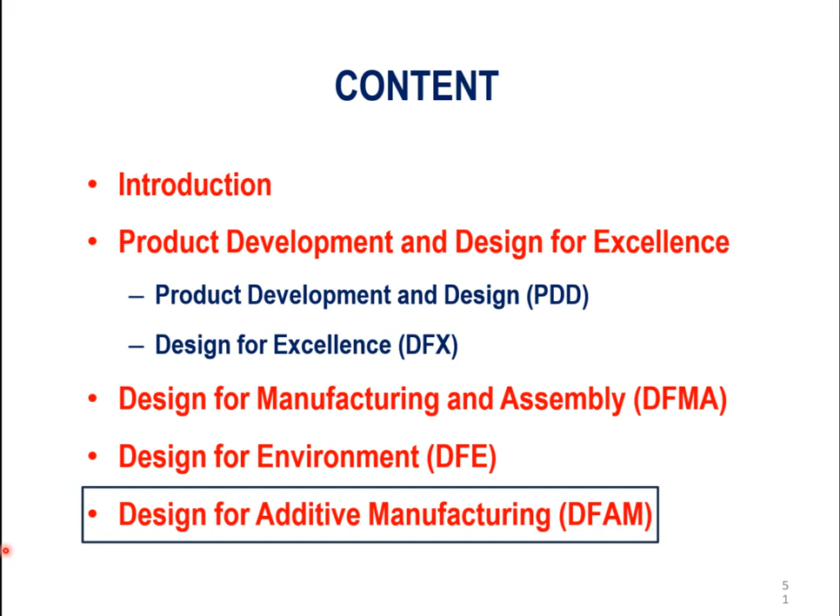Okay, so our fifth and last part of week six lecture is going to be about design for additive manufacturing. So design for additive manufacturing, or DFAM, is design for manufacturability using additive manufacturing or 3D printing technologies.

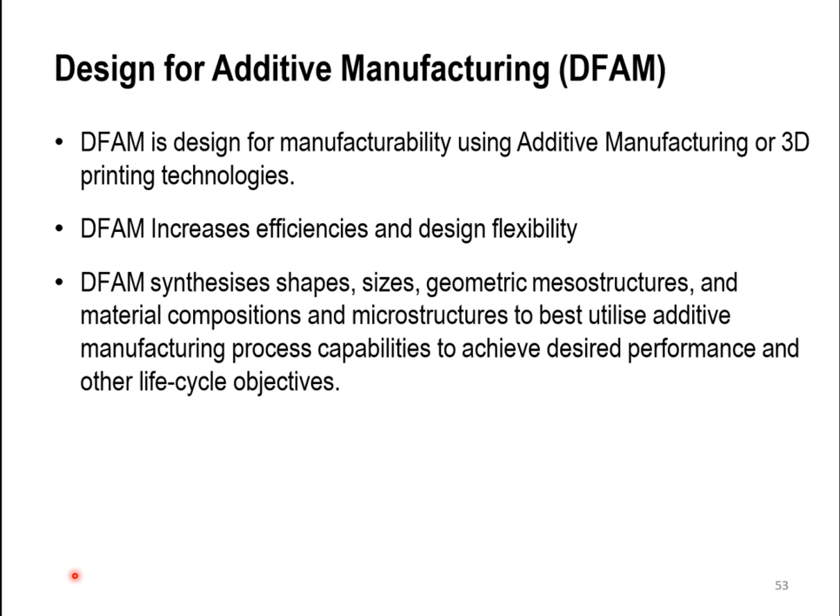DFAM is going to increase efficiencies and design flexibility, and synthesizes the shapes, sizes, geometric mesostructures, material compositions, and microstructures to best utilize the additive manufacturing process capabilities to achieve the desired performance and other life cycle objectives.

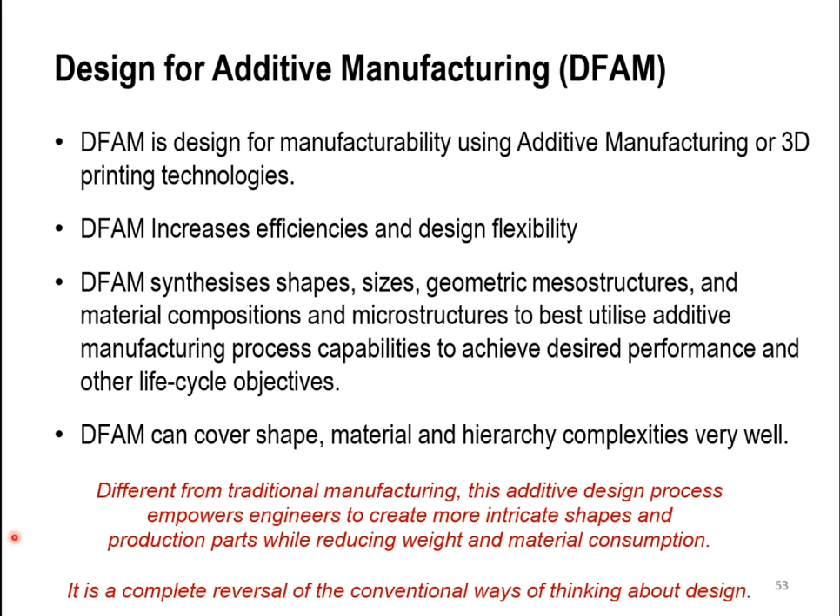So DFAM can cover the shape, materials, and hierarchy complexities very well, so it's quite different from traditional manufacturing. This additive design process empowers engineers to create more intricate shapes and production parts while reducing weight and material consumption. So it's a complete reversal of the conventional ways of thinking about design.

For example, DFAM is a collection of rules and best practices that designers and engineers must follow to achieve a high level of success in 3D printed part designs.

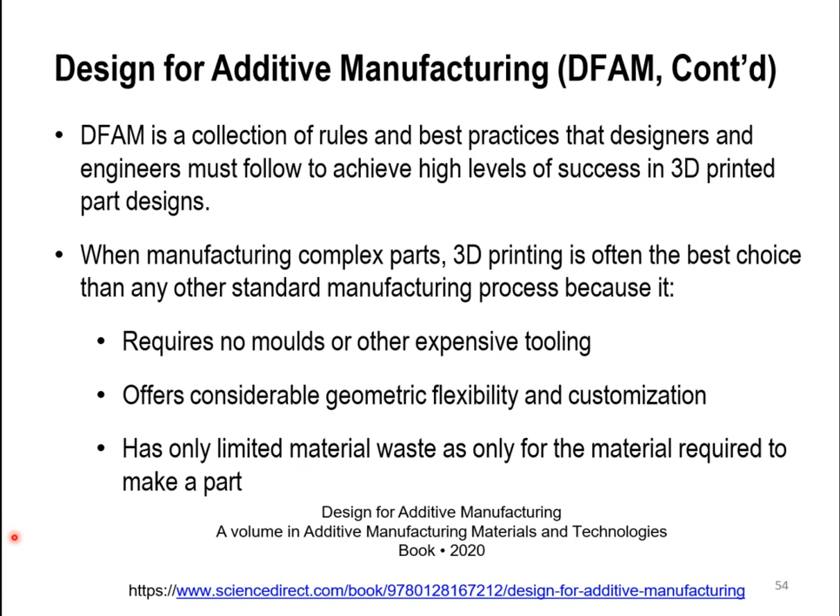When manufacturing complex parts, 3D printing is often the best choice over any other standard manufacturing process, because first, it requires no molds or other expensive tooling. Also, it offers considerable geometric flexibility and customization, and has only limited material waste, as only the material required is used to make the part.

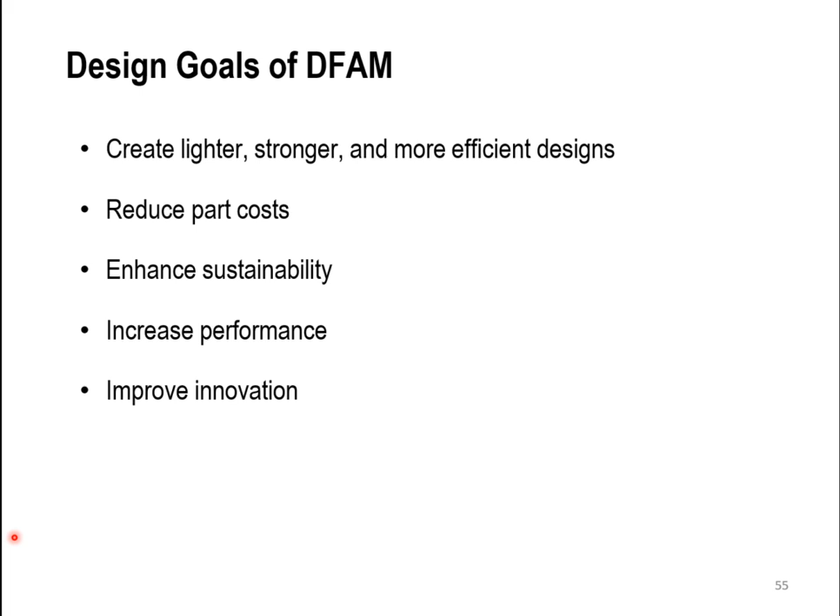The design goals for DFAM are: first, create lighter, stronger, and more efficient designs. Second, reduce part costs. Third, enhance sustainability and increase performance. In all cases, it's going to improve innovation.

So design for AM - I'm going to show you an example of its importance here. This drawing of the part rendered above reveals the difficulty of designing tall walls and other special features using 3D printing.

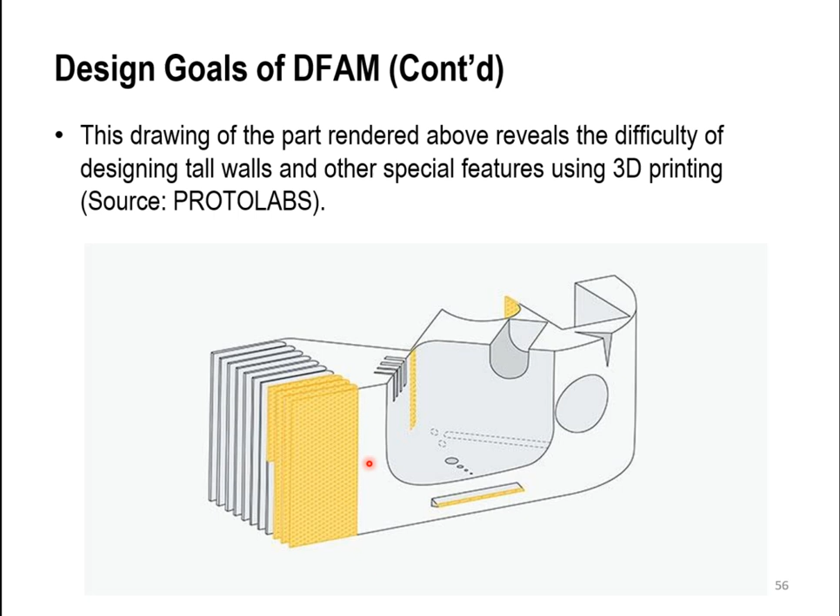So you can see here we're going to have multiple walls, multiple holes, different shapes. Some of them can actually be enclosed within the part and still be done without any assembly process. So small gaps in features also pose a difficulty for 3D printing - the plastic, affected by gravity, wants to sag or warp if given the chance.

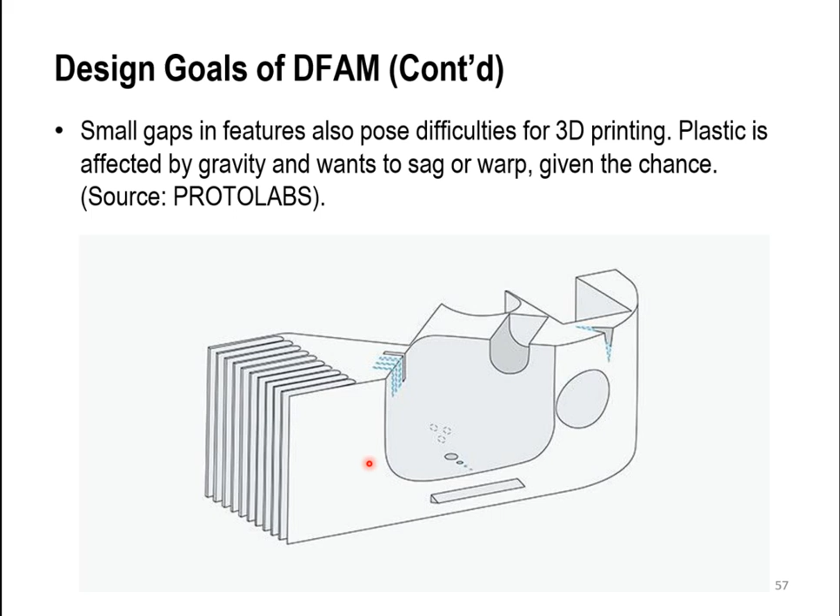The approach of DFAM is first, generative design - to create and iterate designs that meet a given set of input criteria for the application.

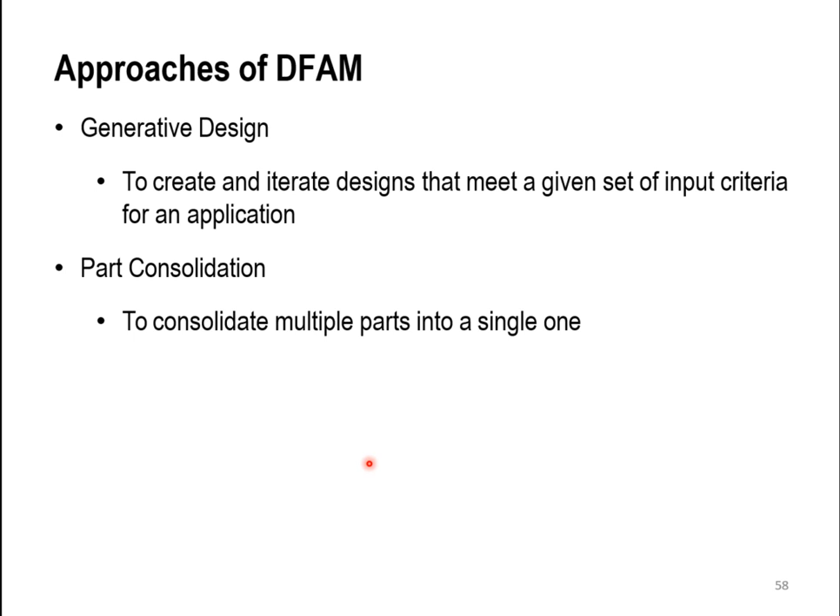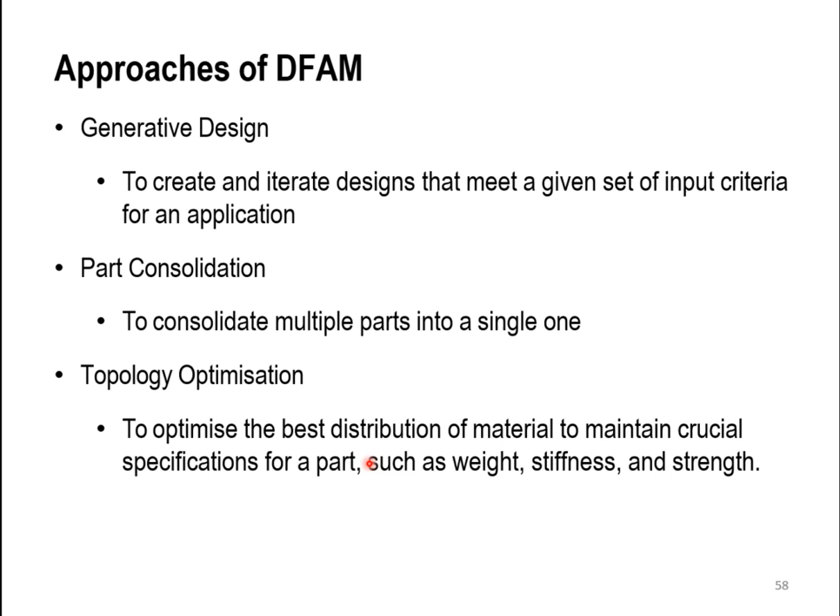Also, there's part consolidation, where multiple parts are consolidated into a single one. And topology optimization, which is about optimizing the best distribution of materials to maintain crucial specifications for the parts, such as weight, stiffness, and strength.

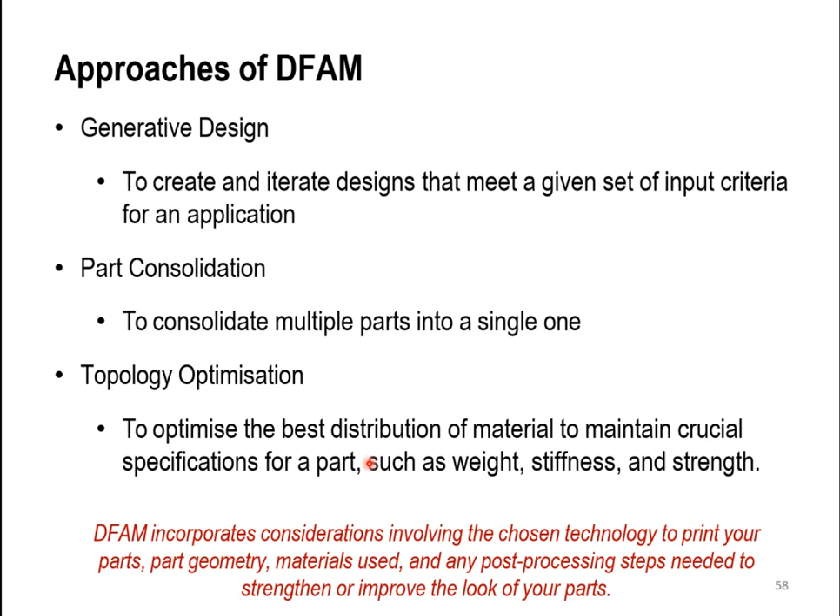So DFAM incorporates considerations involving choosing the technology to print your parts, the part geometry, the material used, and any post-processing steps needed to strengthen or improve the look of your part.

The design guidelines for DFAM are, first, about wall thickness - so you don't want to make it too thick or too thin.

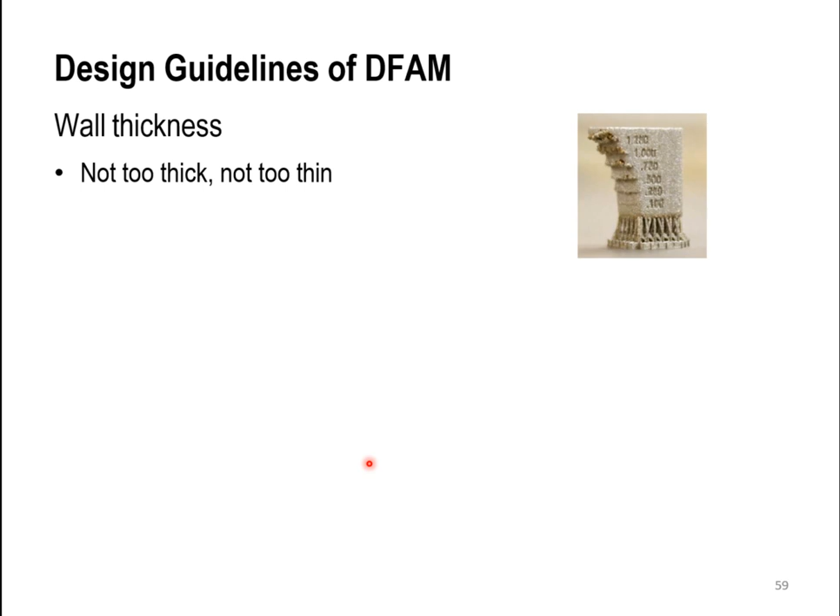Next, self-supporting angles - law of gravity, heavy areas affected by gravity tend to sag or warp as the parts are being built, so you want to ensure that any features can support their own weight during the build by using smooth transitions to control the potential sag.

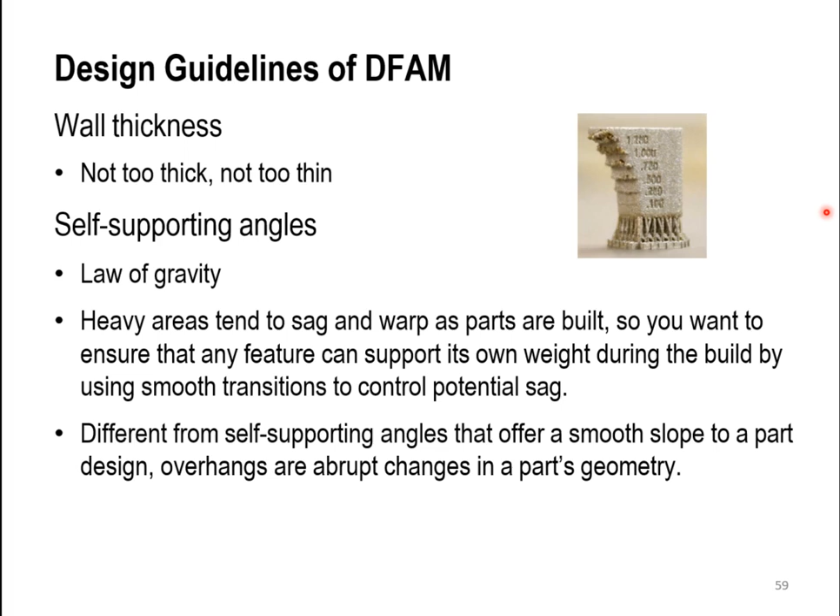Different from self-supporting angles, which offer a smooth slope to a part design, overhangs are abrupt changes in the part geometry. For metal 3D printing, any overhang greater than 0.02 inches or 0.5 millimeters should have additional support to prevent damage to the part during the build.

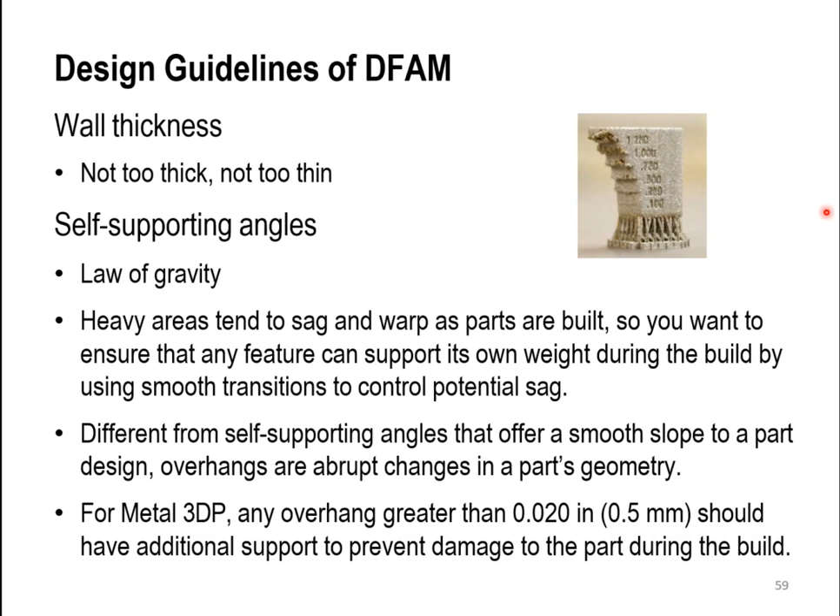The minimum feature size for each printing process varies based on its capabilities to print small features. For SLA, it's about 0.0635 millimeters. The DMLS is 0.153. The FDM desktop printer is 0.2, and FDM Industrial is also 0.2. For PolyJet, it's 0.305 millimeters. For Carbon DLS, it's 0.508. For MJF, it's 0.508 millimeters. And for SLS, it's 0.762 millimeters.

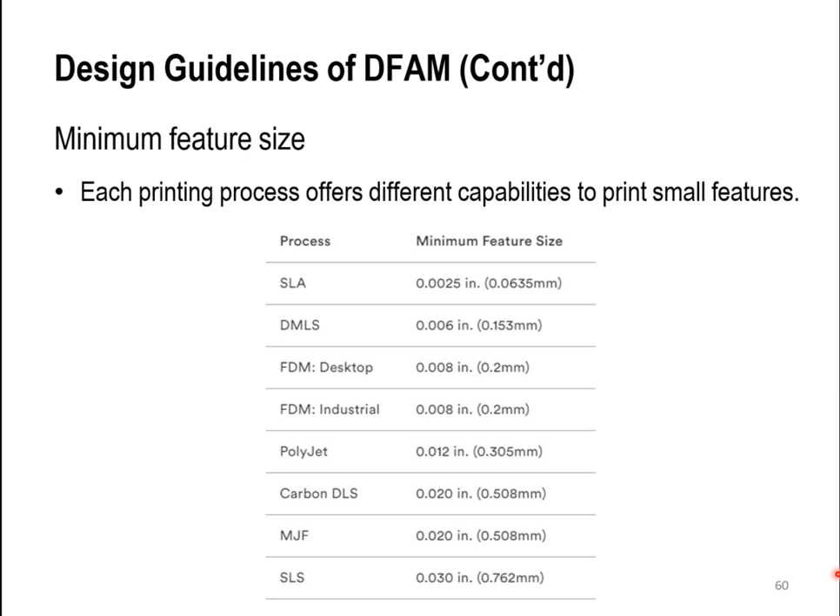Internal channels are very possible to create using additive manufacturing. You could say we can do something similar using casting, such as lost wax or similar processes, but making the core for that part becomes one of the hardest tasks.

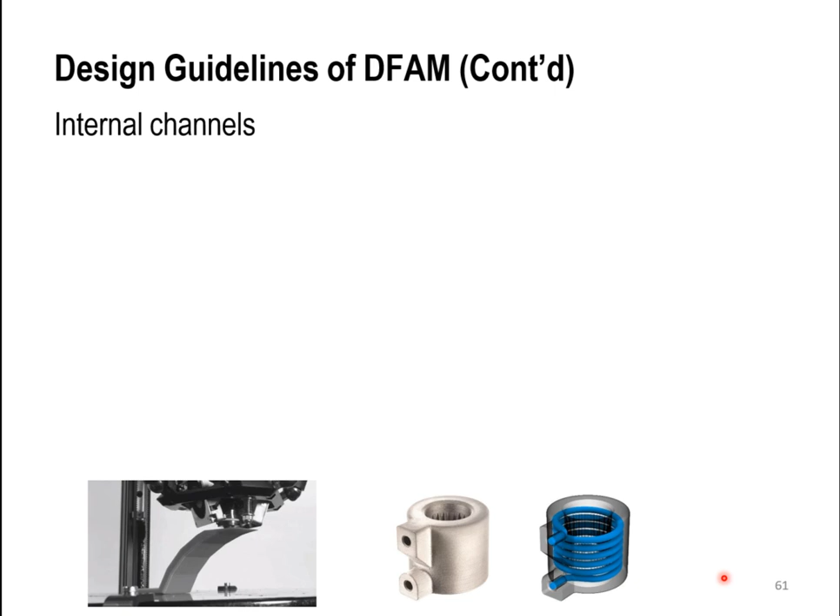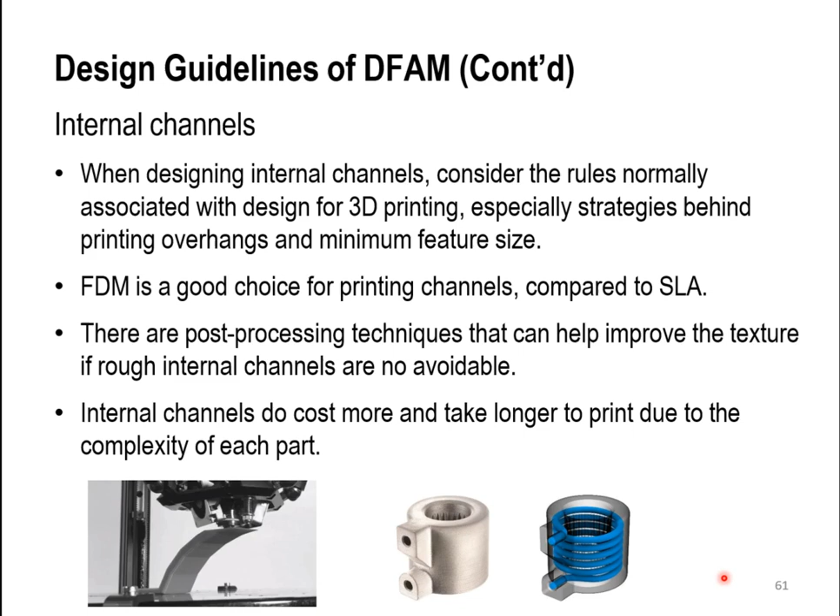When designing internal channels, consider the rules normally associated with design for 3D printing, especially strategies around printing overhangs and minimum feature size. FDM is a good choice for printing channels compared to SLA. Some post-processing techniques can help improve texture if rough internal channels are unavoidable. Internal channels do cost more and take longer to print due to the complexity of each part.

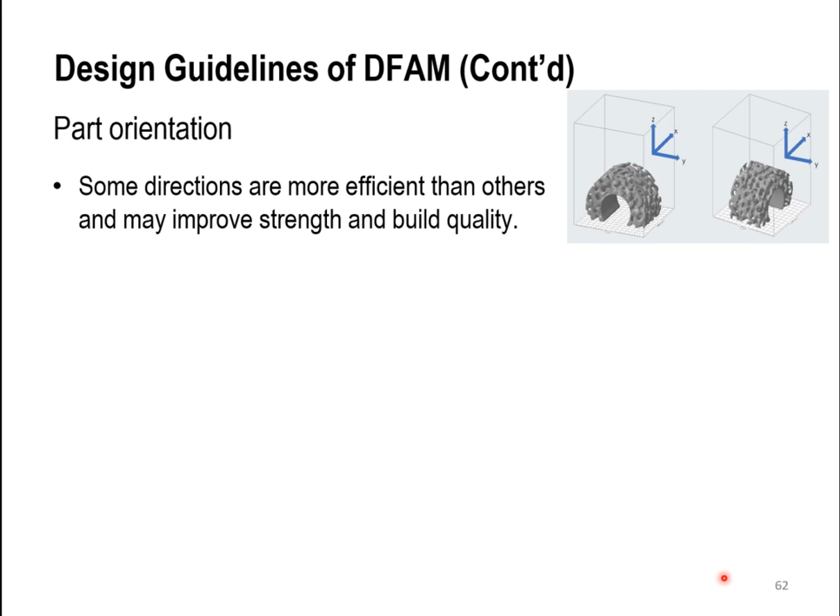Part orientation is also one of the important things—it's about how you do the slicing and which way you print. Some directions are more efficient than others and may improve strength and build quality. So determining what should be the z-axis, the direction the part grows from, turns out to be crucial.

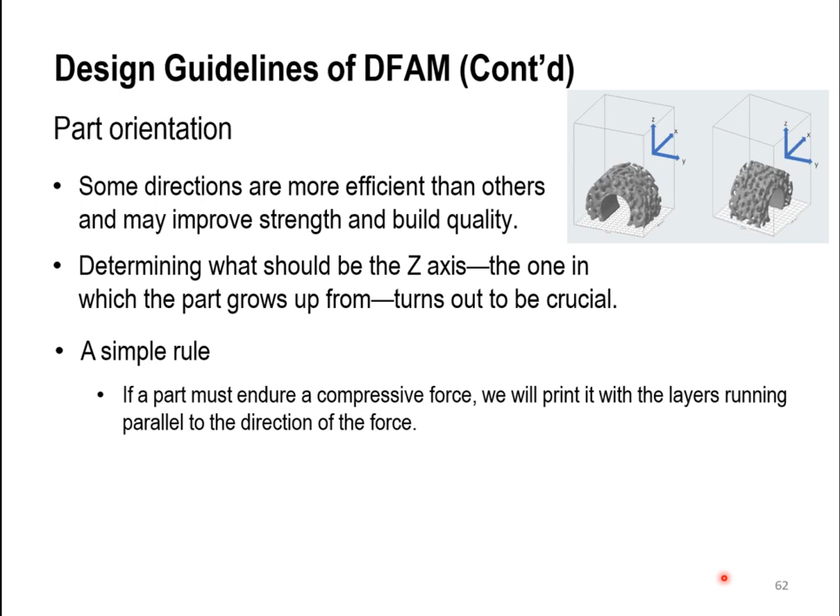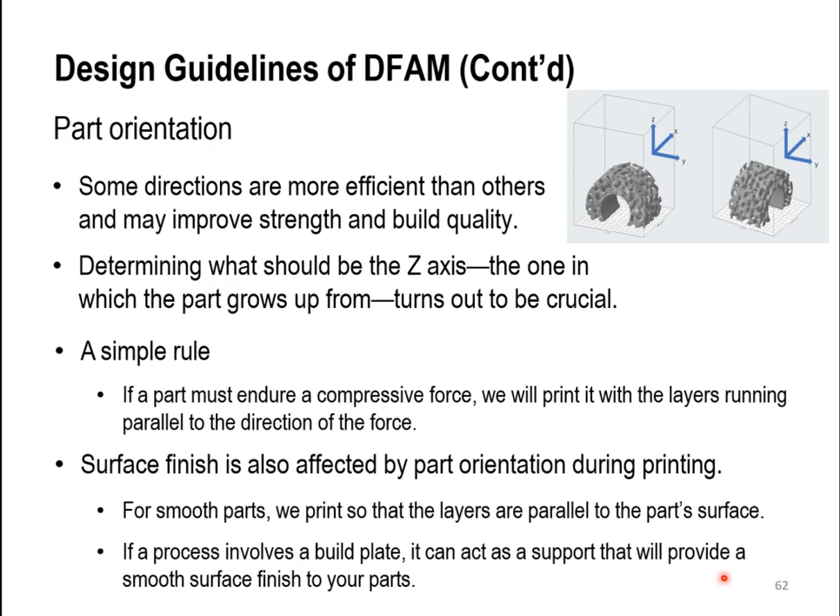A simple rule can be applied: if the part must endure a compressive force, we print it with the layers running parallel to the direction of that force. Surface finish is also affected by part orientation during printing, so for a smooth part, we print so the layers are parallel to the part surface. If the process involves a build plate, it can act as support that provides a smooth surface finish to your parts.

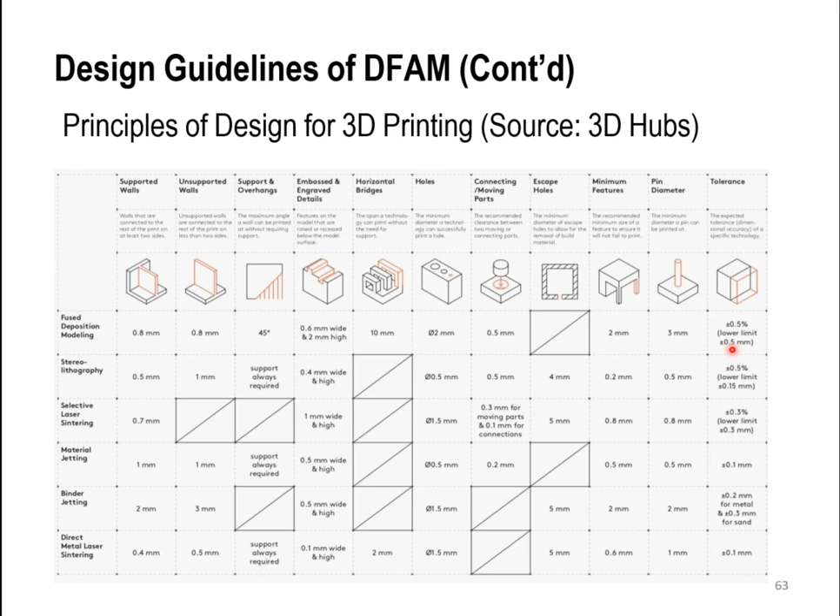So these are some principles for 3D printing design. We can see that, depending on the part you're making, there are supported walls or unsupported walls, support and overhangs, embossed engraved details, horizontal bridges, holes, connected moving parts, escape holes, minimum features, pin diameters, and tolerances. With different processes, these are the dimensions we can achieve.

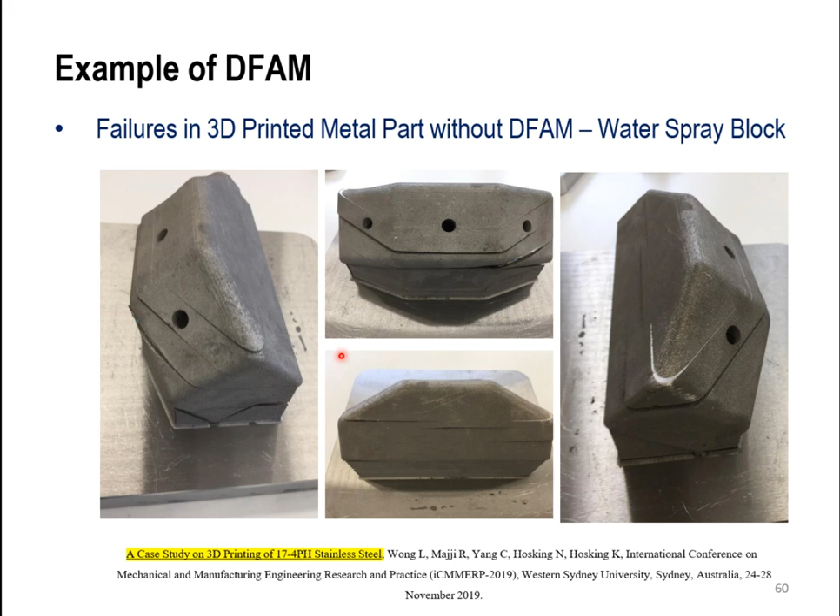An example of DFAM is the failures in 3D printed metal parts without DFAM, for the water spray block. You can see some defects have occurred due to the process, such as surface roughness and internal design issues.

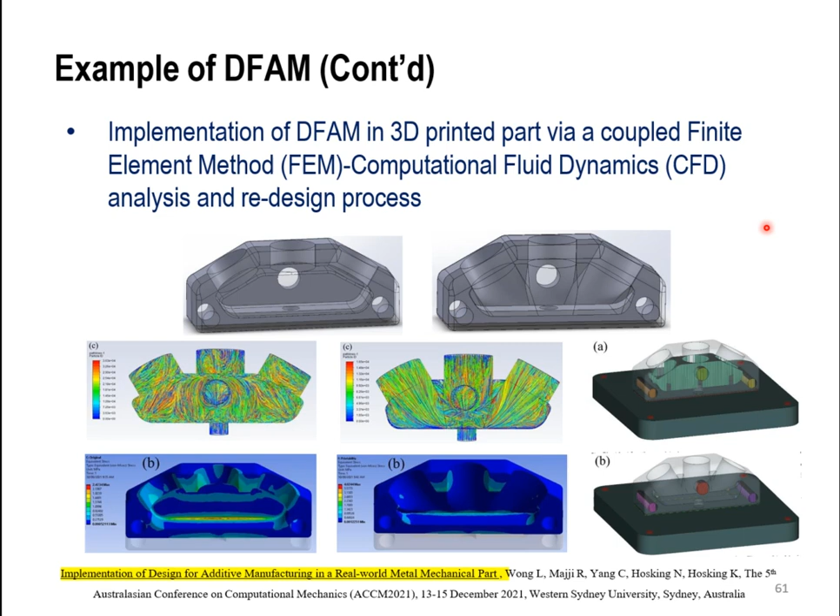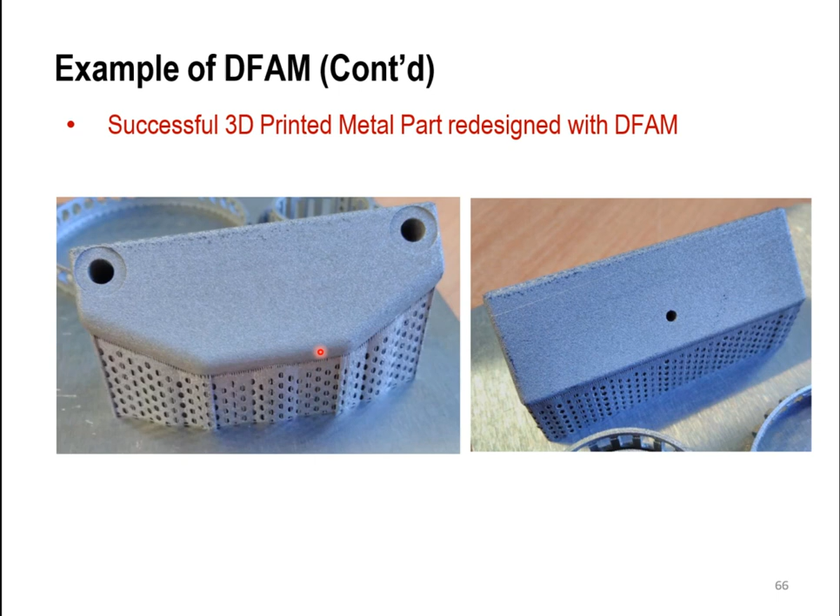Here we see the implementation of DFAM in 3D printed parts via coupled finite element methods and computational fluid dynamics analysis, redesigning the process until we achieve the best design. That results in a successful 3D printed metal part redesign with DFAM. The weight has been reduced by reducing the density of the parts, and the channels have been optimized to have the best flow with less pressure loss.